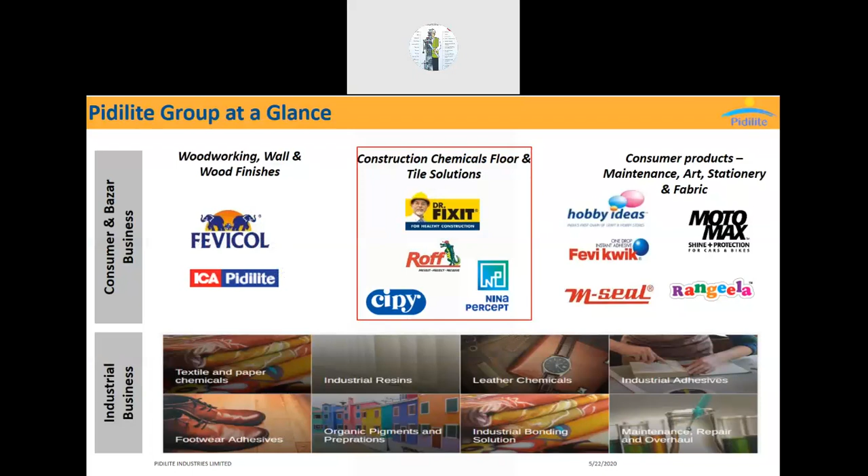Most of you may know what Pidilite Industries is. I just wanted to give you a small glimpse. Half of the people in the industry know Pidilite Industries by the name of Fevicol. Yes, Fevicol is our brand, and you would have seen Mr. Amitabh Bachchan related to waterproofing coming on the website. This is the brand of Pidilite Industries which is into waterproofing, called Dr. Fixit. I represent the Dr. Fixit division of Pidilite Industries. We are also into other businesses like Fevikwik, M-Seal, and all those things.

Now, straight away coming to the product selection category. What we are talking about today is construction chemicals, and particularly about waterproofing within that division. Other than waterproofing, I just want to make it clear for everybody's understanding - today's discussion is more of a technical discussion on waterproofing: what are the latest technologies available, and what do the IS or BS codes say for waterproofing. So it's all about knowledge sharing. It's not about product selling - it's mainly a technical discussion.

So when we talk about construction chemicals, waterproofing is one of the divisions. Other than waterproofing, we have building repairs, tile fixing, sealants, grouts, industrial flooring - these are a few other things within construction chemicals. Now coming to the agenda of today: we will cover what is waterproofing, how do we consider it for design, and what waterproofing materials should be considered for different areas. This will be the approach for the agenda.

Coming to the first point - why do we need waterproofing and what is the need for it? On a civil engineering note, what are we doing? We are constructing a structure which we want to be durable enough, to make sure it lives for a longer period. But if you allow water to pass through, the problem that appears is that the water ingress corrodes the steel and decreases the durability of the concrete. So to avoid this ingress of water inside the concrete, we make the construction water tight or waterproof so that water does not ingress inside the concrete. This is the main reason for doing waterproofing.

Now, what is the reason for doing waterproofing which was not used a couple of decades back? Earlier, in our own houses built 20-30 years ago, we hardly used to do any waterproofing. But today, why is waterproofing required and what is the need? What has made it necessary? I will explain to you the factors.

Urbanization and limited land availability - today all the buildings are skyscrapers, bigger in size with an increasing number of floors. All areas have been put to more utilities. For example, in podiums earlier we used to have only raw walkways, but now podiums have landscapes, hardscapes, swimming pools. When it comes to terraces, they're used as clubhouses, swimming pools, hanging swimming pools, and a lot of machinery, coolers, and such things are kept on terraces.

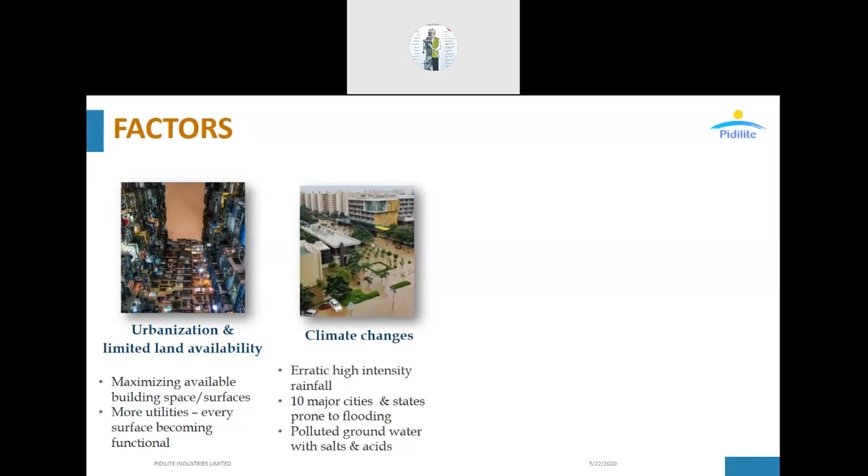And climate changes - yes, today the climate has changed in such a way that most metropolitan cities have started experiencing such heavy rains which were never seen for decades earlier. So flooding and high water table increase, and fast-paced construction and concrete quality - today we are de-shuttering concrete within 24 hours, 12 hours, and we are looking for higher strength concrete.

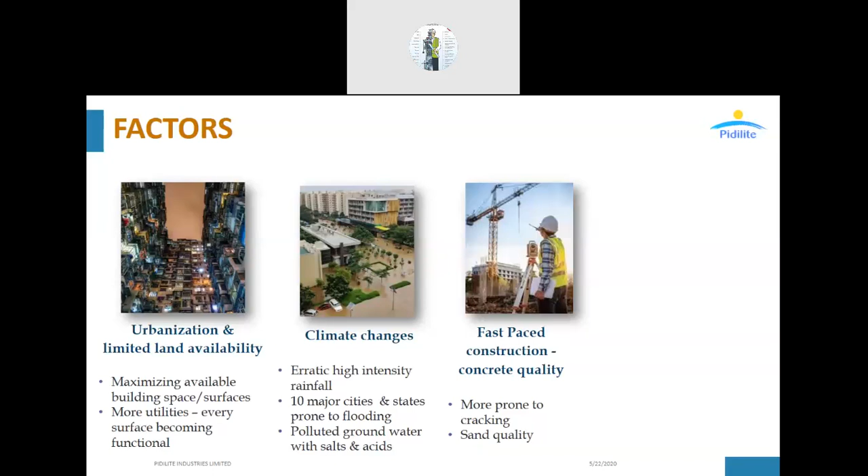And most of all, the quality of sand available today. Earlier, most places used natural sand which was available everywhere and had binding materials like clay and other minerals. Today we have used so much of it that we've been told not to use it anymore and to go for an alternative - manufacturing sand. What is manufacturing sand? It's quarry dust or something similar, available from the crusher, which is just powder. It doesn't have the basic requirement of minerals, so bonding and cohesiveness becomes a problem.

And if you see, most of the projects or buildings which have had durability failures over a period of time, it's because of water. Earlier, as I said, there was no waterproofing, but 65-70% of the time, over a period of 20, 50, 60 years, it has been seen that because of water, the reinforcement gets corroded and the durability of concrete is reduced. So with all this, these are the few points which have made waterproofing one of the key focus areas in today's market.

How does this waterproofing failures occur? What are the problems? Why do we have issues?

When we talk about construction, waterproofing would cost you 1% of the total construction value. But we neglect and reduce to cut down that 1% cost, which will lead to almost 5 times the same value once it needs to be redone later.

Because you need to remove the entire things, redo and relay the damage on the concrete and the other things. So we are guiding and getting this type of presentation done to make sure that at least

waterproofing is done initially so that the concrete and the structure remains in good condition. And there are a lot of issues on our material and type of material here. We have been taught that waterproofing is like one chemical used for everything, but to be honest, it's not.

So the same one waterproofing compound may not serve all your required parameters. Choosing and identifying the right product, it all matters. Now coming to the areas of waterproofing - we normally discuss and divide it between two areas: substructure and superstructure.

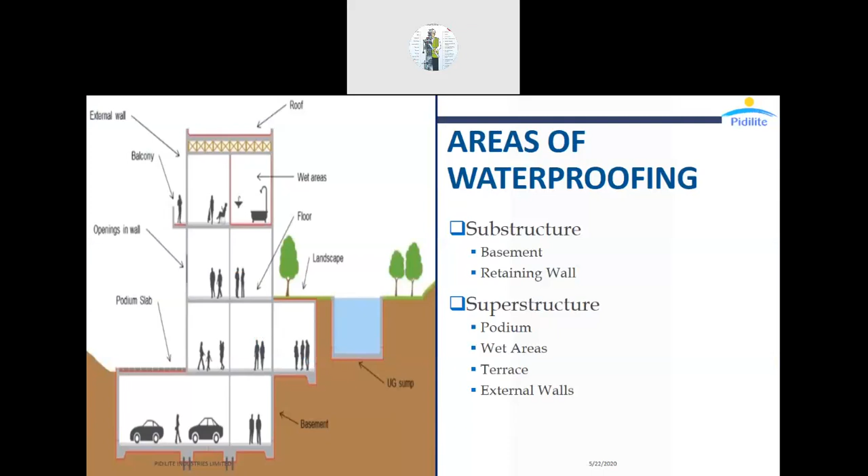Substructure is waterproofing to be done for all areas below the ground level - that is basement, retaining wall, and certain tanks. Superstructure is for the podium, toilets, terrace, and all those areas. So now we will divide this between substructure and superstructure, starting with the substructure.

For better understanding, I see a lot of fellow people from the industry, and I also see a lot of students. For the benefit of the students, waterproofing has been divided into three categories or three segments.

One is integral waterproofing system. What is integral waterproofing system? This is the system where the material or chemical is added inside the concrete. In a sense, you are adding the chemical during concrete mixing and making the concrete hydrophobic, so it will not absorb water. This is called integral waterproofing system.

The next system is preformed membranes. Membranes is another layer of system where the material comes in a sheet or roll formation, which is laid at the site. This is the other segment called preformed membrane.

The third segment is called liquid applied membrane. Liquid applied membranes come in a can or packed material in a liquid state. It is applied by brush, roller, or even spray applied machines, which when it comes in contact with the concrete, bonds and fuses to make a permanent system. These are the three segments in waterproofing for better understanding.

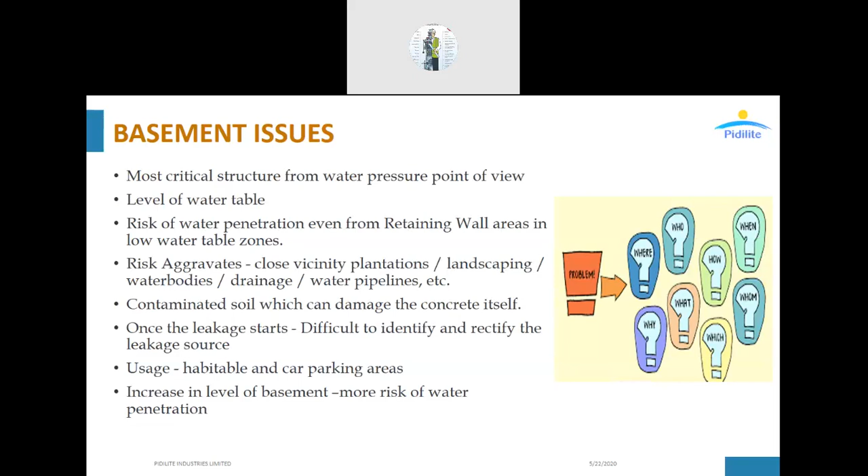Now coming to the next point - the common terms used in waterproofing to address retaining wall and basement issues. Before we decide a system, we need to find out at what level the waterproofing is to be done. For example, say you have excavated an area to a depth of around 10 meters.

As per your soil investigation report, it says the water table is at 6 meters, but you have excavated 10 meters. So in a sense, the last 4 meters of the excavated area is in a high prone water table zone, meaning it's always submerged in the water table.

This is called high water table. For example, low water table area. What do you mean by low or fluctuating water table? You have excavated 10 meters of land, and the water table as per the soil investigation report says 12 meters. So the entire 10 meters excavated is not even touching the water table. So it is low water table.

Next comes what is positive and negative side of waterproofing. Positive side waterproofing is the area where you are doing the waterproofing to the structure, not allowing the water to pass in, not to seep into the concrete. So you are protecting the concrete.

Next point to be noted, whether the area is confined or non-confined. To put in simple language, confined area is where the shuttering is at one side, and the other side is the rock, the shotcrete wall, or the piled surface. Non-confined area is a two-side shuttering wall. So these are the few parameters which we need to consider when we are talking about basement waterproofing.

Based on this, we will have to design or suggest suitable waterproofing material.

Now, coming to the next point. When we consider these parameters, how do we choose a material, and what parameters should be considered while choosing the material? For example, we need to find a waterproofing material which should bond to the raft, avoiding lateral migration of water or subsoil settling. Either it should conform to any of the codes so that it is easy for us to measure the parameters.

Can it be applied in wet conditions? Yes, when you are doing a below-ground construction, you cannot get a dry structure because there will be a lot of parallel activities. It should ensure structural protection. Yes, this is the main parameter we are looking into.

Should be resistant to subsoil contamination, like sulfur content in the soil or chloride content in the soil. Maybe chloride content is not so applicable for us in Bangalore, but in seashore areas where the water content and chloride content is more, it should be fast and easy to apply.

Yes, once the waterproofing is done on the PCC, then the raft construction happens, and there will be a lot of other activities on top of it. So we should not take more time, which will hamper the flow of the construction activity.

Should be eco-friendly because of today's requirements, and the material should have good puncture resistance, tensile strength, and tear resistance. What do you mean by puncture resistance?

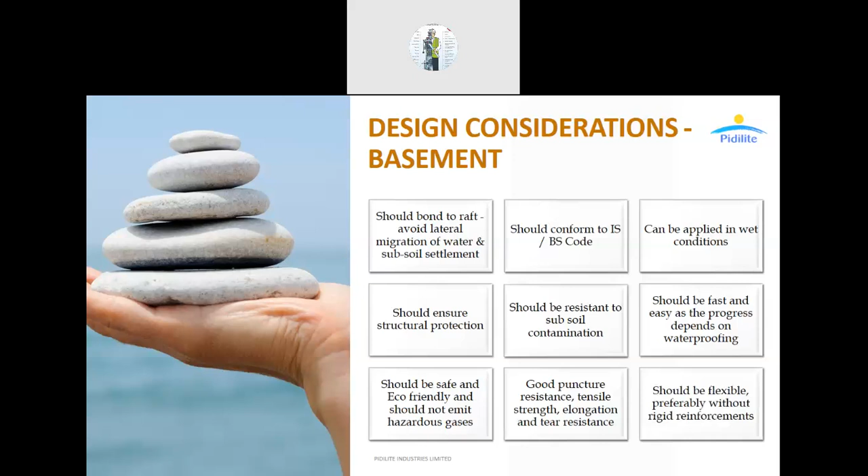It should have good elongation. This means if there is a crack or something that occurs in the concrete, the material should be able to bridge the crack. So these are the few parameters.

Now coming to waterproofing types, as per BS 8102:2009, waterproofing is categorized into three types: Type A, Type B, Type C.

Coming to Type B, Type B is the integral type, as I said in the categories. Type B waterproofing is where you are making the concrete watertight by putting chemicals inside the concrete to make the concrete waterproof. Type C is a drain system.

So you have cavity boards and cavity drain membranes, which are routed to proper drain channels where the water is dewatered by pumping it out with lift pits or other collection pits. But in today's scenario, Type C is very less used, or even not recommended and not used. It is either Type A or Type B of waterproofing that is used in the market.

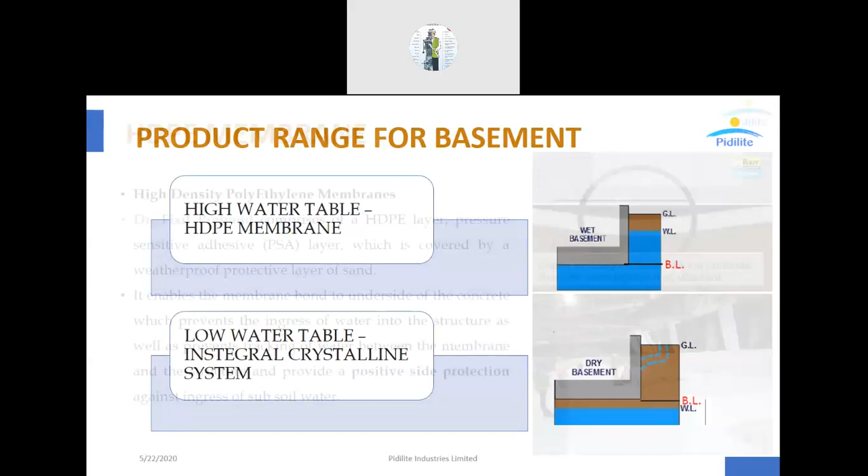As per the IS code, how do we consider whether it's a high water table or a low water table? I described this some time back - if I dig a 10-meter area, at what level is the area, and at what level is the water table? This is shown pictorially. If you see high water table in the diagram on the right, the blue color at full level means the entire structure is under water. The one below is a dry basement, where the water table is well below the structure. Based on this, how do we design?

Coming to HDPE membrane, as per the IS code it says fully bonded system. What is this fully bonded system and what is this chemical made up of? This chemical is first made up of a system called HDPE - high density polyethylene, made up of a three layer segment.

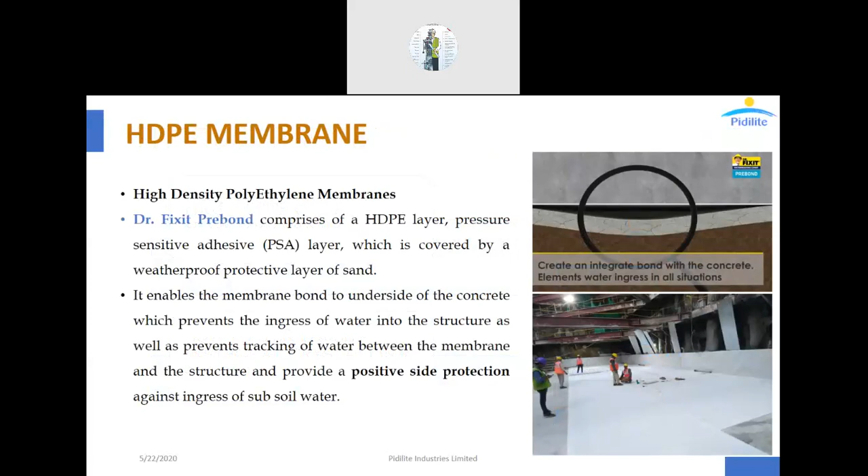Excuse me guys, can you just give me a minute? Just give me a minute please. Sorry for interrupting, I just have some problem. Just give me a minute.

Talking about the HDPE membrane, as per the IS code, this is made up of high density polyethylene, which is nothing but like a plastic sheet. Along with this, it is bonded using an adhesive - a glue or gum - which is applied and laid. When laid, this membrane reacts with the adhesive, which is acidic in nature, while concrete is a base. So it reacts and forms a very high bond adhesive acid, which bonds to the wet concrete, making the membrane fully bonded to the concrete on the backside. This is called a fully bonded system.

If you see the two diagrams on the right hand side, this white line highlighted in between shows how the membrane will be bonded to the concrete. If there's any lateral migration or subsoil settlement, nothing will happen because the membrane remains part of the concrete. The photo below shows the white colored segment - this is where we have applied the membrane on top of the PCC, followed by steel and then concreting, where the membrane gets fully bonded. This type of waterproofing is called positive side waterproofing, where we are protecting the main raft.

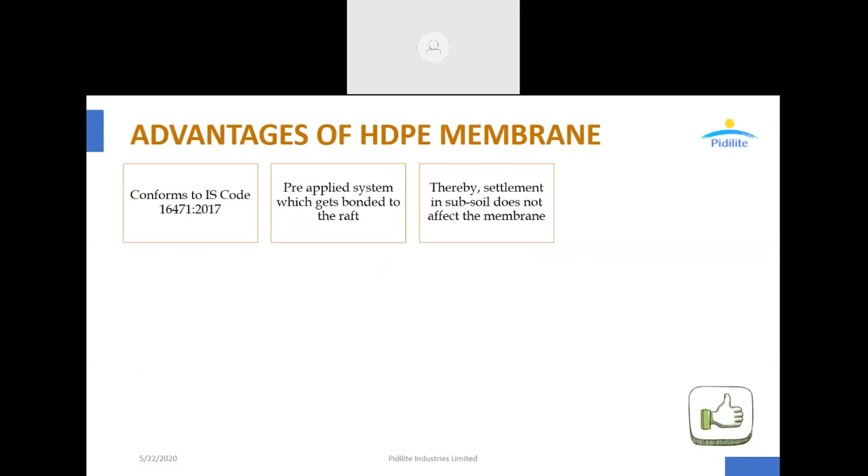So this is about the fully bonded system. What are the other parameters we had? Coming to the next point - advantages of the membrane. As we were discussing, whether it will withstand and pass through the codes - yes, it is as per the IS code, so it conforms. It is pre-applied and gets bonded as per requirement. It is fully bonded, and settlement in the subsoil does not matter. This is adhering to the required properties, and it is fulfilling all the required parameters.

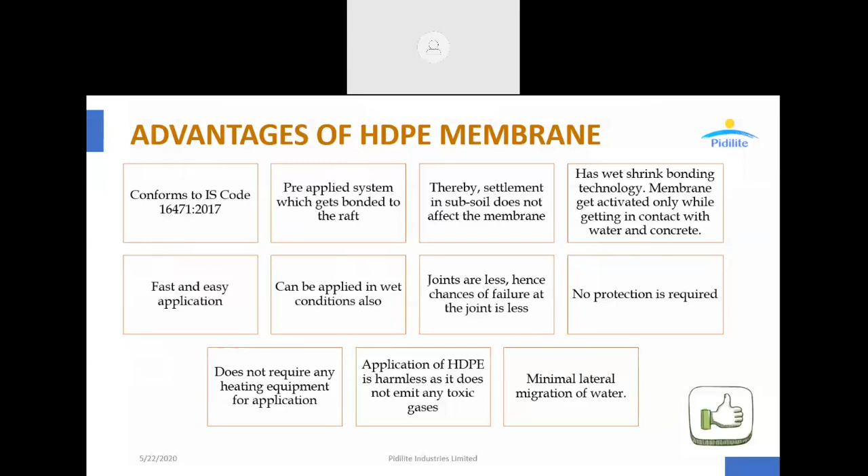This is one of the things we'll have to consider, and this is how membrane waterproofing is done in the basement - I'm talking about the horizontal area. Now coming to the vertical part, that is the retaining wall in the substructure. What are the points we see, the problems, and the things we need to consider when doing retaining wall waterproofing? High water table and heavy rain cause leakage in retaining walls. If you see the construction activity of a retaining wall, because of the shuttering done with plywood, every 2.1 meter width and depth, there are a lot of construction joints.

Or even we can call these cold joints. These are the joints which normally appear between the old and new concrete. Today we pour one concrete and tomorrow we pour another, so the concrete strength and gain properties will remain different, due to which a minute hairline crack forms.

This leads to a lot of leakages. If you see conditions today, when we go to any big buildings, most of the leakages and damage we find is on the retaining wall. The retaining wall is the area where the first amount of water comes in contact, because adjacent areas of the retaining wall are filled with earth.

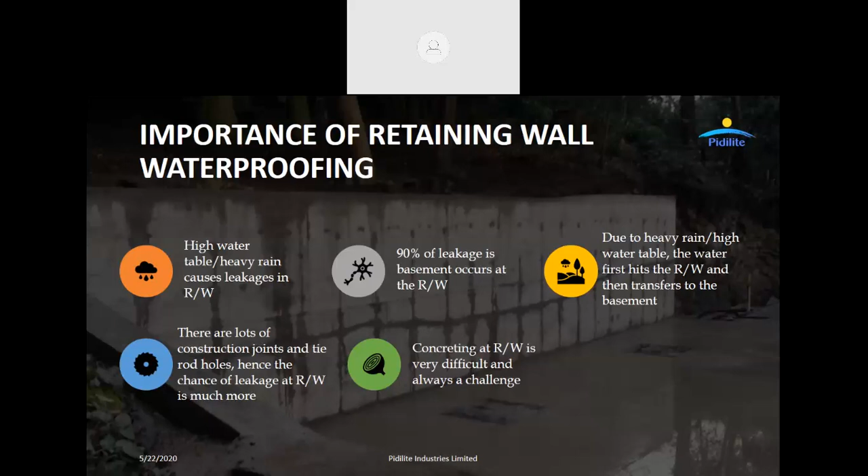So if there is rain and the water table gets full, water will get into it. These are the few parameters we have to consider while planning a waterproofing membrane. So what should we have? We need the membrane or waterproofing material to be jointless, because there should not be double joints so that water can penetrate anywhere.

Also, once the material sets, there is a lot of backfilling, so the material should complete the work fast and setting should be fast. It should also have good bonding. What do you mean by good bonding?

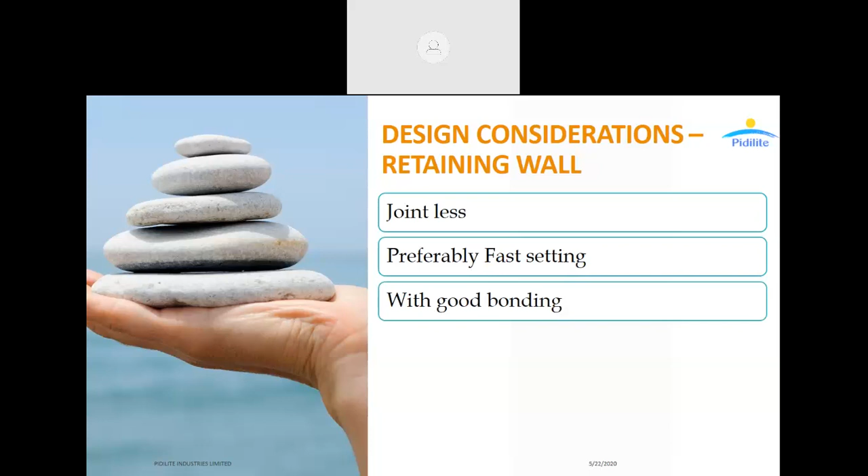For example, you are applying a material on the retaining wall. So there is one more layer we are doing on the retaining wall. Now the length and breadth of the retaining wall is huge, for example 50 meters by 10 meters. So now when I apply my...

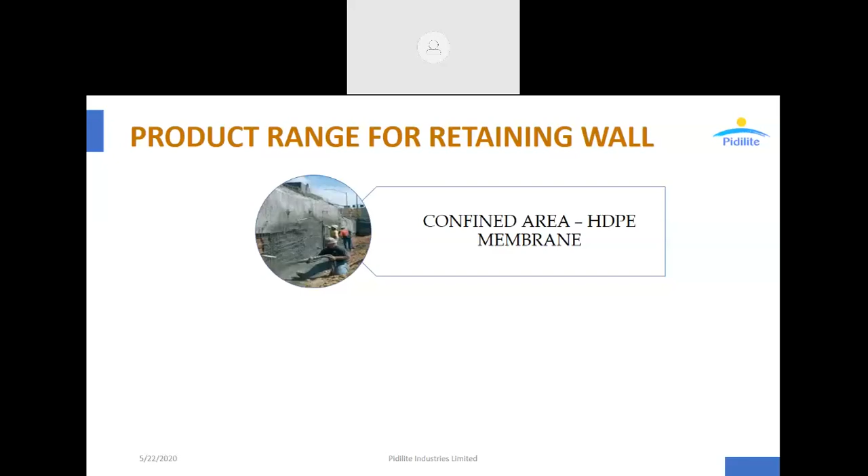...unconfined area. Unconfined is a normal construction where we have access from outside, so we can go and do the route and plan it. Now, if it is an unconfined area—because I've already discussed waterproofing with fully bonded systems—if it is an unconfined area, how do we do it and what do we do?

Normally in the market or in the segment, what we address is called bitumen membranes. Most of you, if you've gone to site, students, you can see a black sheet kind applied on the vertical line. That is called bitumen membrane, or tar membrane.

But how do we apply tar? How do we put tar on the road? Tar itself is a brittle material which comes out of the residual process of petroleum engineering, which is brittle and hardened. How do we melt it? We need to heat the material. Same way, if I have to apply this bitumen membrane, I have to use gas or fire to stick it to the surface.

But this leads to a lot of harmful gases, and getting this material and using a gas cylinder indoors is again a safety issue. So instead, we came out with a technology—everybody has this technology—self-adhesive bitumen, where we are not heating it up or releasing harmful gases to the environment. We have a normal membrane which we lay, so we can use this.

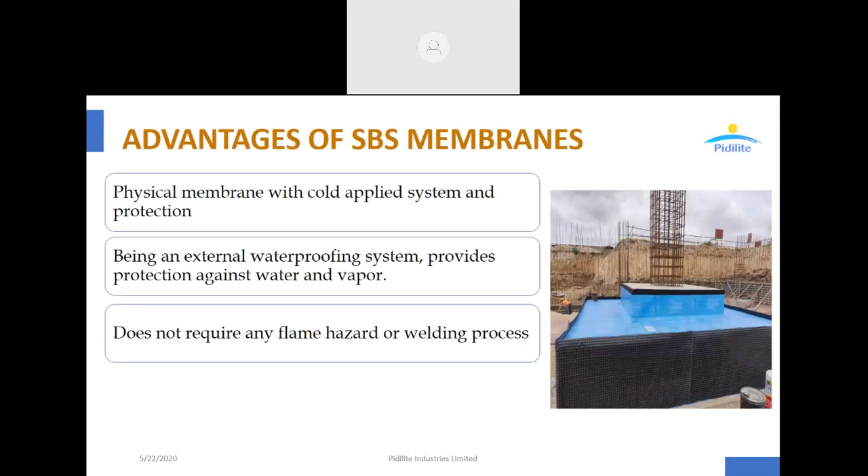But there is also a disadvantage: it's not a jointless system. One membrane to the other membrane, it's like sheet to sheet, you'll have to bond. So joints are high, and since you already have a lot of joints in the concrete, chances are it will leak again at the joint. These are the parameters.

Now coming to the next point of discussion—as per ASTM, I'm considering and covering all the codes so everybody should be aware of different types of codes. I started with BS, then IS, now I'm talking about ASTM. As per ASTM, any liquid applied membrane which is applied directly to the slab in order to...

...obtain a 1.5 mm plus or minus film thickness—so the liquid applied membrane should be applied to a minimum thickness of 1.5 mm. This is what it says as per ASTM C898.

What is this liquid applied membrane? As we discussed earlier, we categorize into integral, preformed, and liquid. These liquid applied membranes are either applied by brush or roller. The packing looks like a tin, which contains liquid material. When applied, it is like paint, but after it forms a film, it is fully bonded to the concrete. So this is how it works.

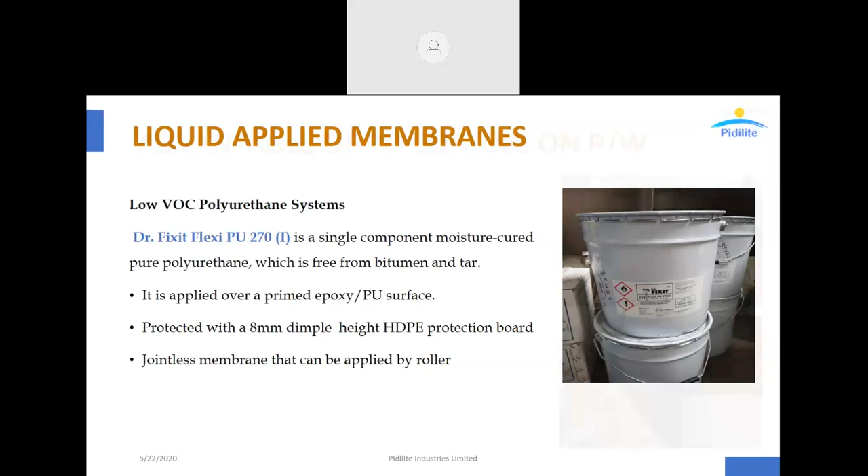So what is the advantage of doing this? These are liquid applied membranes, which belong to a category of chemicals called polyurethanes. Polyurethanes are moisture cured materials, meaning when you apply it on the substrate like paint, it reacts with the moisture available in the air and forms the film. There is no acid or alkali added to make it tighten or bond to the substrate - it cures on its own. So this is the application of the membrane.

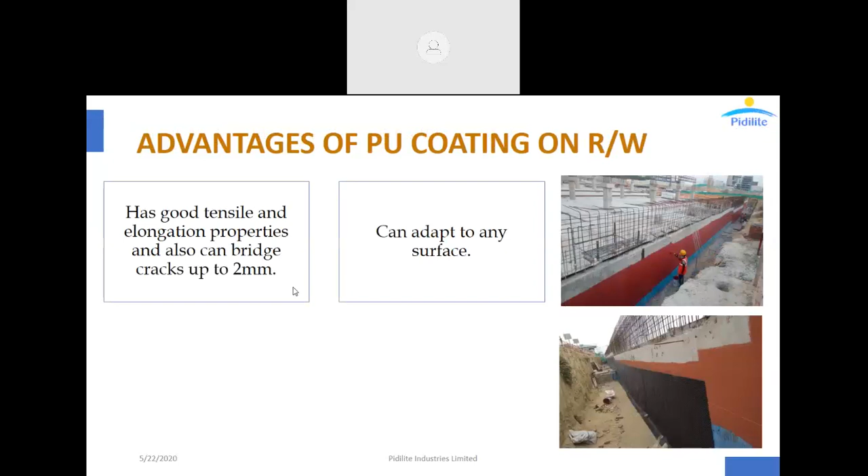Coming to the photos on the right hand side, the red color thing is the person applying the material to the retaining wall. If you look at the photo below, you can also see a black color sheet on top. Why do we need this black color sheet, and what is it? Today you can see the area where the polyurethane waterproofing is applied.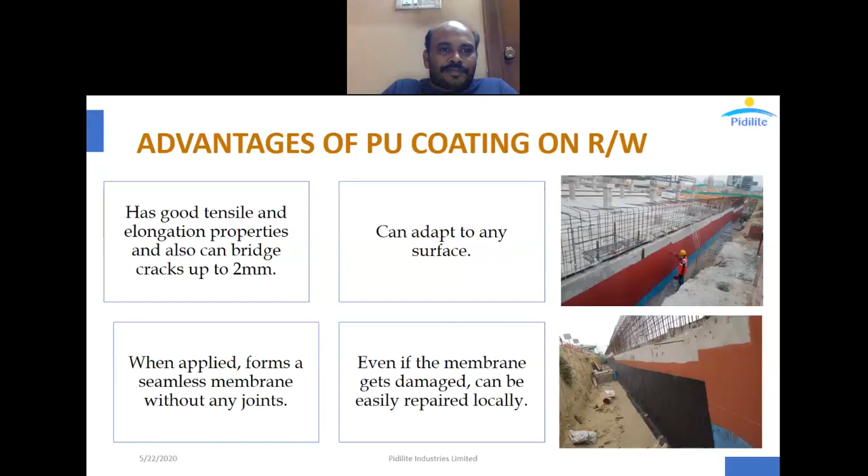There's so much gap between the excavated area and the retaining area, so what do we do there? We do backfilling - we get all materials available on site and just backfill it since it's not useful for us otherwise. So what happens is you have boulders, rocks, other materials and debris falling in, and there's a possibility of the membrane getting scratched or damaged due to the load.

Why it happens is for 10 meters down, the person will not do it from below - after 2 meters he will use a tipper and unload it, so there's a possibility of damage. So we need to have a protection board - this black color layer is the protection board.

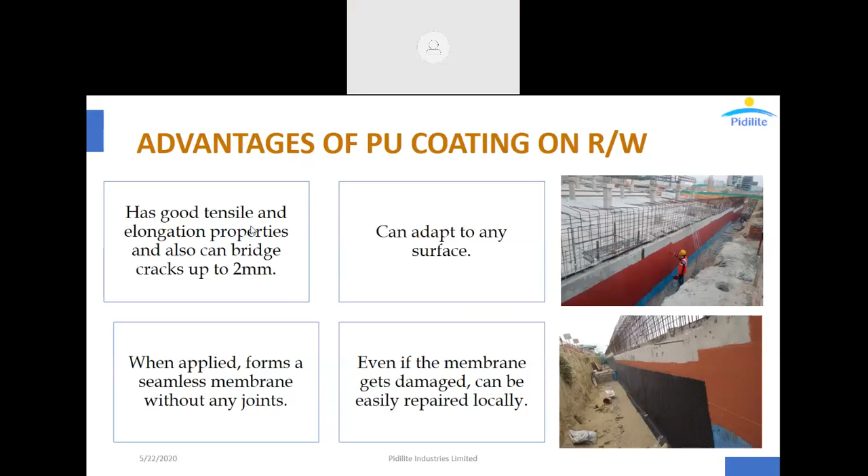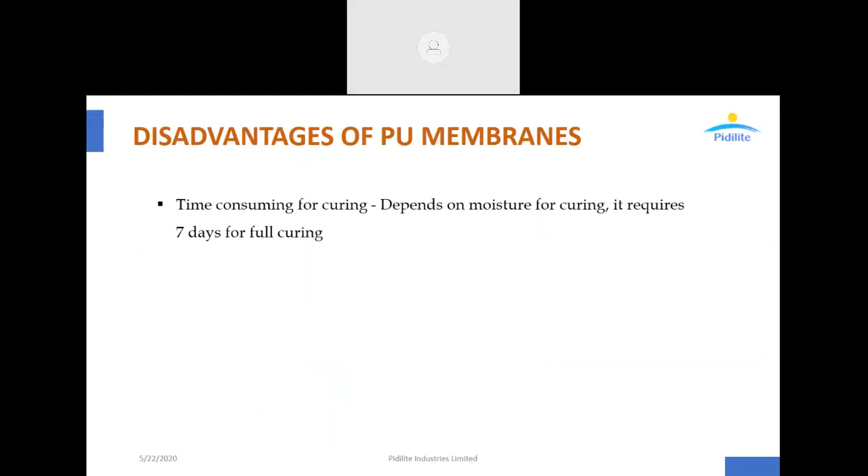So what are the disadvantages of this polyurethane membrane? Polyurethane membranes are moisture cured, as I said, and to achieve its full properties it needs to be cured for 6 to 7 days under the right conditions, and the moisture content in the substrate should be low. But inside, getting a bone dry substrate is so far not possible. In podium areas and above, and in retaining walls, it's easier because it's exposed, so drying of the substrate will happen.

Now to summarize and close the substructure discussion - we discussed what has to be done as per code, covering IS code, BS code, and ASTM, and the types of membranes: fully bonded system, loosely laid system, and liquid applied system.

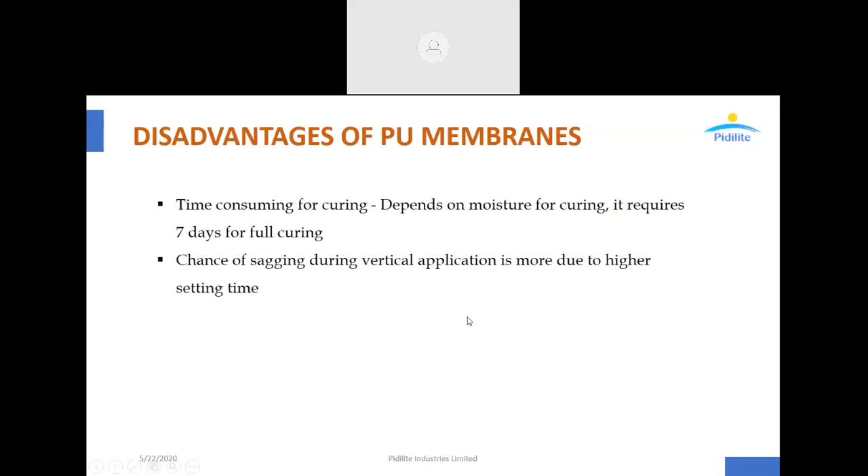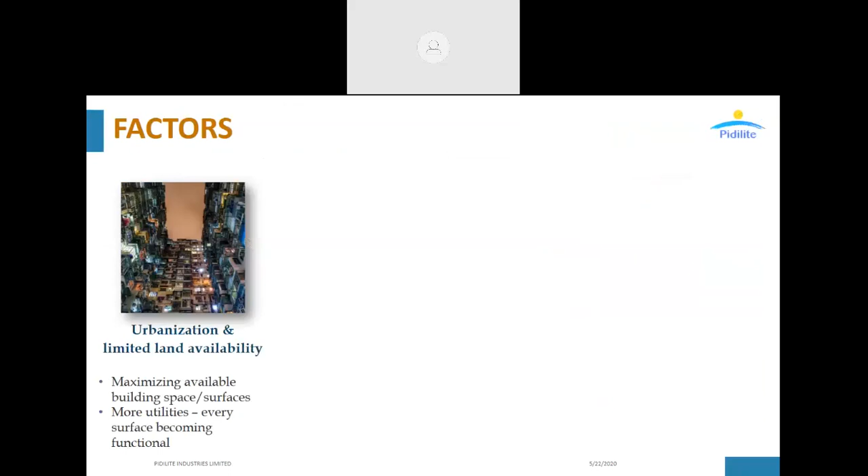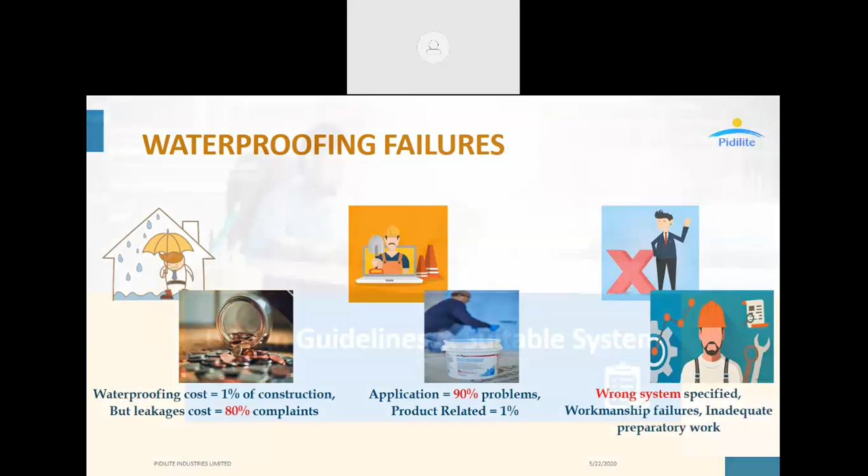So what we were talking about today is the need for waterproofing, why do we need waterproofing, factors affecting it such as urbanization, climate change, fast construction, and durability issues. What is failure? Because of not selecting waterproofing at the right time, we end up doing a lot of remedial work and dealing with leakages - so right selection of the right product for the right areas is important.

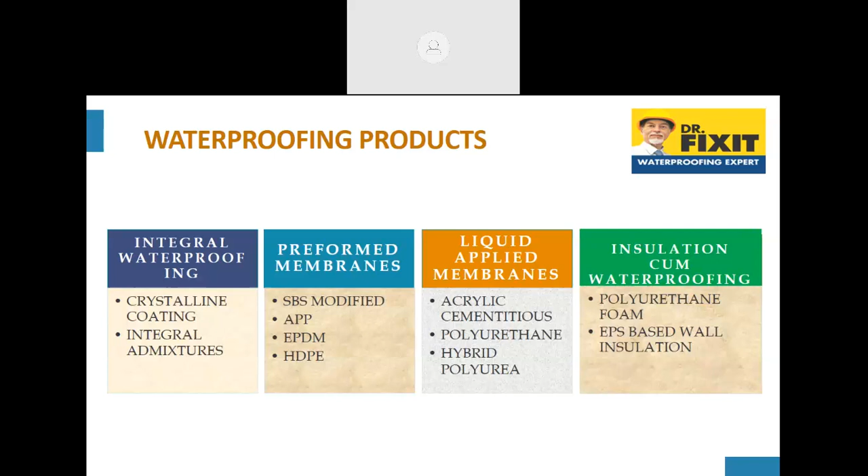And when we do waterproofing, we consider the distinction between substructure and superstructure. So we talked about substructure and the types of material available category-wise: integral waterproofing, preformed waterproofing, and liquid applied. These are the few categories available, along with insulation.

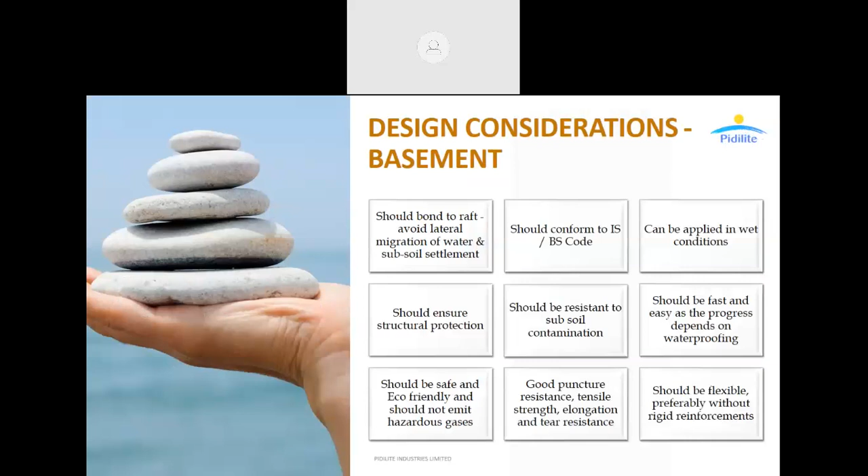So what are the issues in the basement? How do we plan for the basement? And when we consider the basement, what are the types and common terms used - high water table, low water table, positive or negative side, confined or unconfined? What are the basic requirements and considerations for applying a waterproofing membrane in a basement?

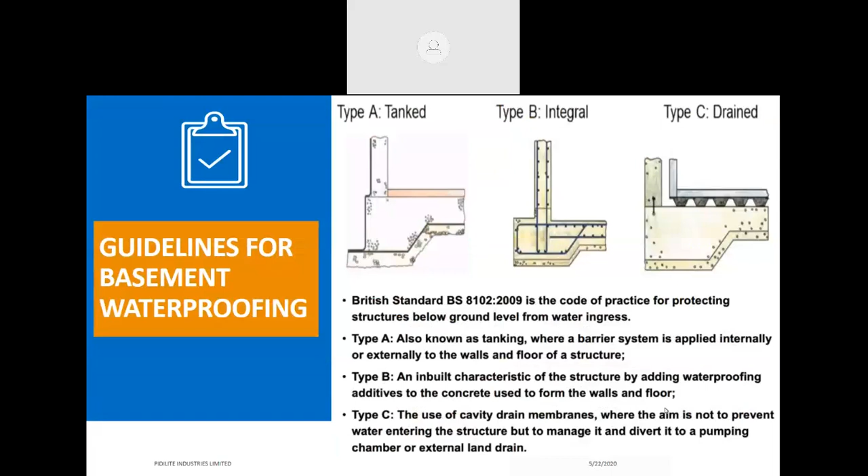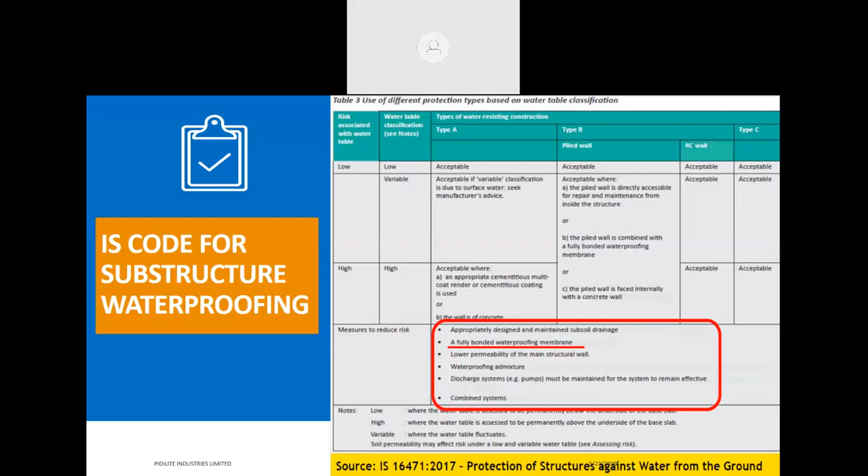As per the BS code, there are three types of waterproofing systems: tank system, integral system, and drained out system. For Indian conditions, the Indian code for basement substructure waterproofing is IS 16471 as per 2017, which talks about the fully bonded system so that there is no lateral migration.

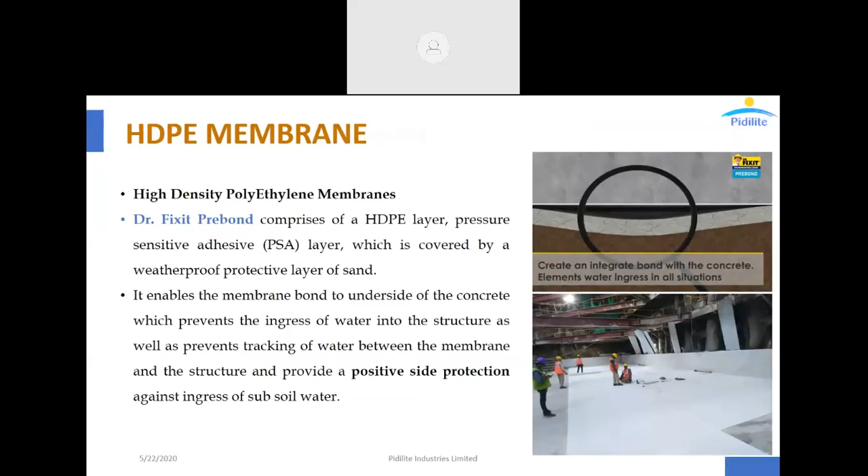So how do we consider product range for high water table or low water table? What are the ways of doing it - if high water table, what material to be used, and if low, how do we do it? What is a fully bonded system and what is the material - it is HDPE. How does it bond, and what parameters does it fulfill as per the requirements?

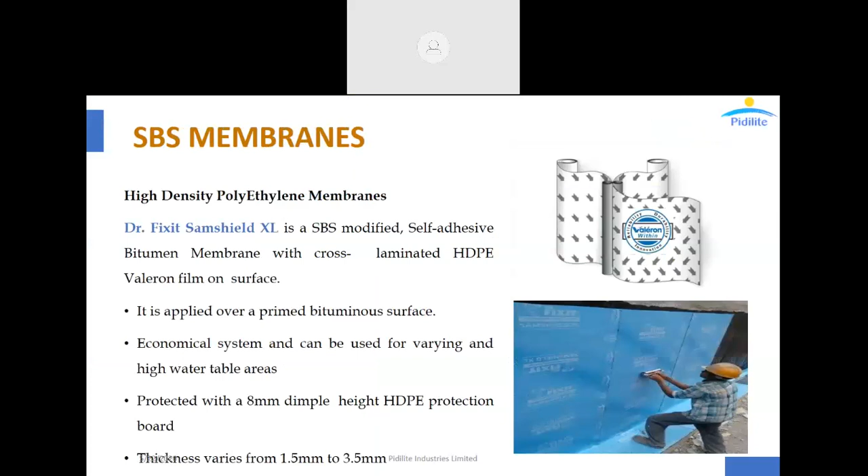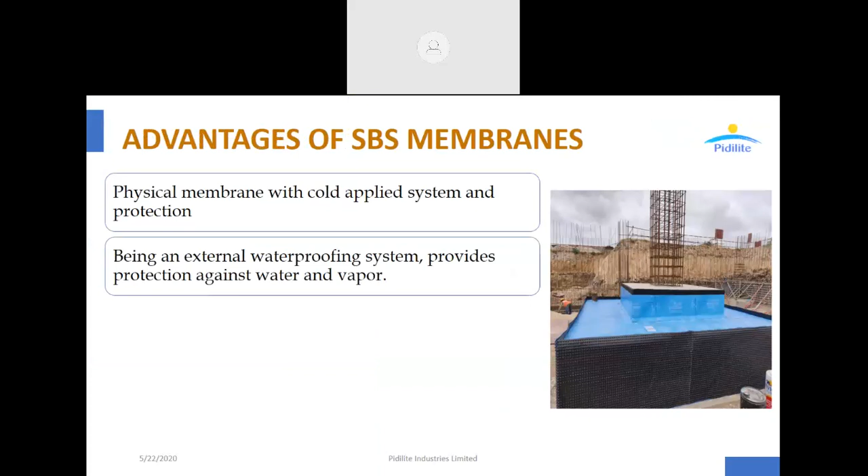In retaining walls there are a lot of joints - what points need to be considered, how do we select the material, the type of retaining wall, whether it's confined or unconfined, the type of material - loosely laid membranes for confined areas or liquid applied membranes for unconfined areas. So this is what we were discussing.